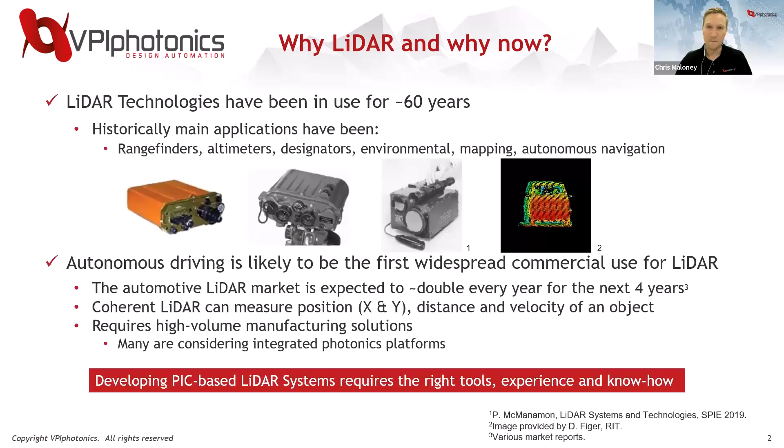So just a very high level overview. I know there's a wide range of people in the room today, some with a lot of experience, some with almost none. So I'll just take you through this block diagram, the concept of LiDAR, how does it work? And then we'll get into more details as we go forward. But it first starts with a waveform generator. So this is an electrical sinusoid that drives your transmitter or your laser. And that laser goes through some optics or some beam steering so that you can actually scan an entire scene.

And that laser will propagate through atmosphere or free space. There might be some weather conditions to consider there. And it will reflect off of a target. And it will reflect back through that atmosphere, back through free space, and get detected on the other side. Now the laser signal and the signal coming back to the detector will actually be mixed together. And what you'll get from that is a beat frequency. And essentially you're measuring the time of flight, so that you can get the distance from your position to that target.

There might also be some Doppler effect if that target is moving. And in that case, you can actually measure velocity as well. And then there's some digital signal processing and readout electronics as well, which we won't touch on today.

So it seems like a pretty basic concept, but there are tons of things to consider, such as the type of system. Is it direct detect? Is it coherent? How are you actually imaging a scene? Are you using flash or scanning LiDAR? What are the weather conditions like? What wavelength are you using? The type of laser, is it a fiber laser or is it an integrated laser? DFB, DBR laser, is it a VCSEL? There's a lot of options there.

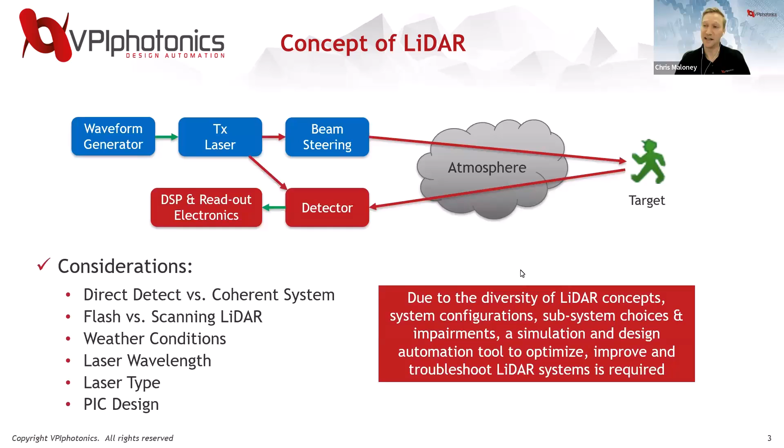So just to give a brief outline, I'm in the middle of some of the background information right now. The first section we'll be talking about is ranging. So we'll actually go through the design of an FMCW LiDAR system. So Nebras will take us through that, show the behavior of it. And then Eugene will join us and talk about the PIC-based transmitter design. And he'll focus really on the laser and the non-linearity of the laser and how do we mitigate that in the system.

And then we'll move on to beam steering, and we'll stay at the PIC level, the circuit level, and talk about an optical phased array for beam steering. And then we'll take it back to the system level and talk about simulating adverse weather conditions and how does that impact the imaging performance of an entire scene. And then we'll conclude.

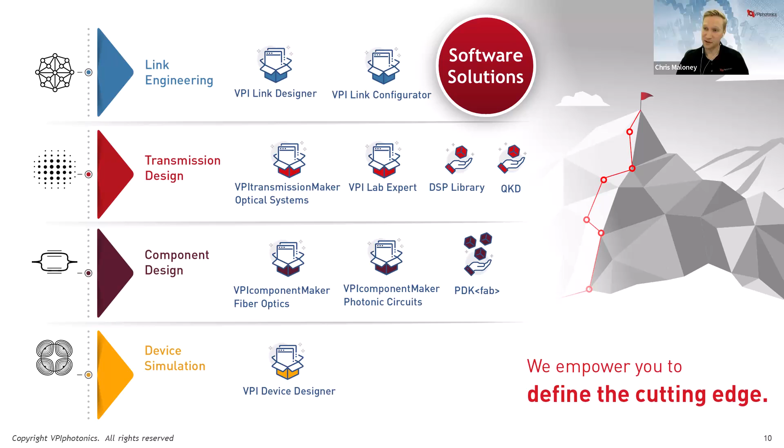So just to give an introduction to VPI Transmission Maker Optical Systems, there's a wide variety of applications this can be used for. It's mainly used in the datacom/telecom space, so for short reach or long haul DWDM systems. But we're getting more and more users using this for free space optics as well. So satellite communications has really been driving that lately, and now LiDAR. And so a lot of what we've developed for satellite communications, we can actually extend into LiDAR as well.

So there's many things you can do, explore different modulation schemes with the software, explore different technology choices. You can see it's schematic-based design. And there's a pretty flexible analysis environment as well that you'll be seeing. So you can see a lot of eye diagrams and constellation diagrams here. And we've actually implemented some custom analysis for LiDAR for this example today.

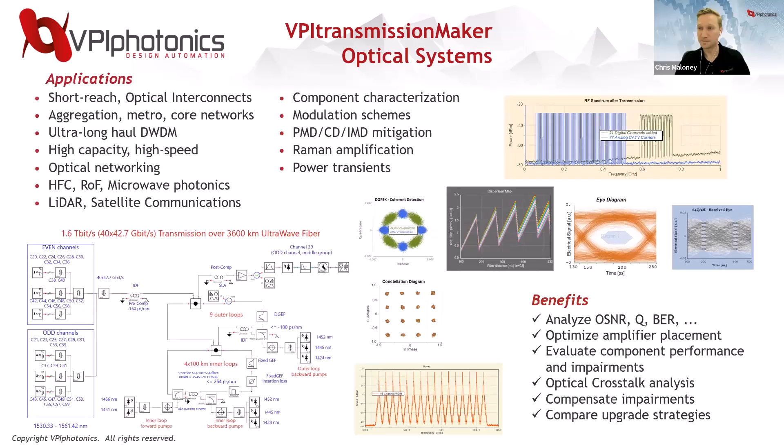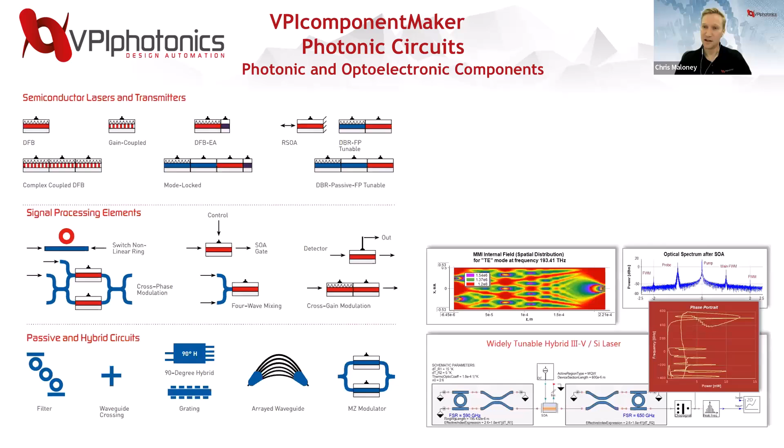We'll also be focusing on VPI Component Maker Photonic Circuits, which includes a library of models and building blocks that include active components, signal processing elements, passive components. One of the key points here is that we actually combine time and frequency domain simulations together. So you can have a quick simulation, but still maintaining the accuracy that you need.

And in particular, we'll be focusing a bit today on our active devices, so the laser, and they're based on the photonics transmission line laser model, or photonics TLM model, that Eugene will be describing today. Some of the key points of that is that it includes carrier dynamics, spatial hole burning, nonlinearities, so gain nonlinearities, two-photon absorption, and it's bidirectional as well. So Eugene will be focusing a bit on that later on today, so stay tuned for that.

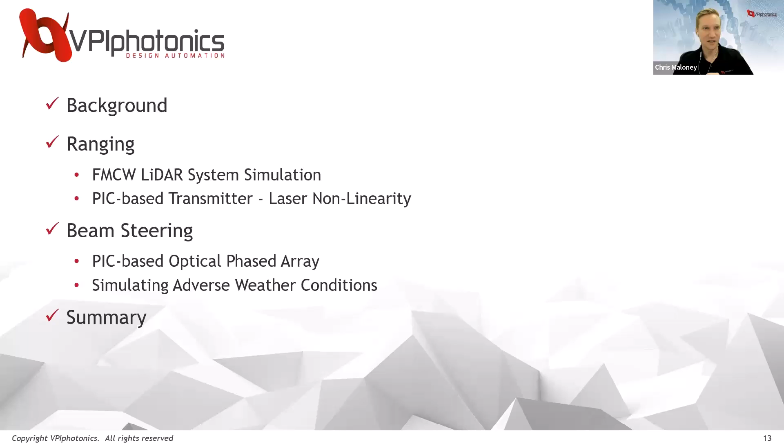And at this point, I'm going to turn things over. We can jump into the technical details. We'll actually get directly into the software, and I'm going to turn things over to Nebras. So Nebras, feel free to share your screen. Thank you, Chris. And the floor is yours now. Thank you, Chris, and hello, everyone.

My name is Nebras, and here I'm showing now the VPI Photonics Design Suite. This is the user interface. Let me move this a little bit. So you see here, we have several parts, and I'm going to focus on the system level. I'm going to start with part 1.

So now I have the schematic open in the workspace, and this is built using our tool for designing optical systems, that's VPI Transmission Maker. And this represents the FMCW LiDAR system. I'm going to explain how it works. So here you see at the transmitter side, we want to do frequency modulation. So we have a laser source with a specific laser average power, with a specific linewidth and a specific wavelength that's in the C band in this case,

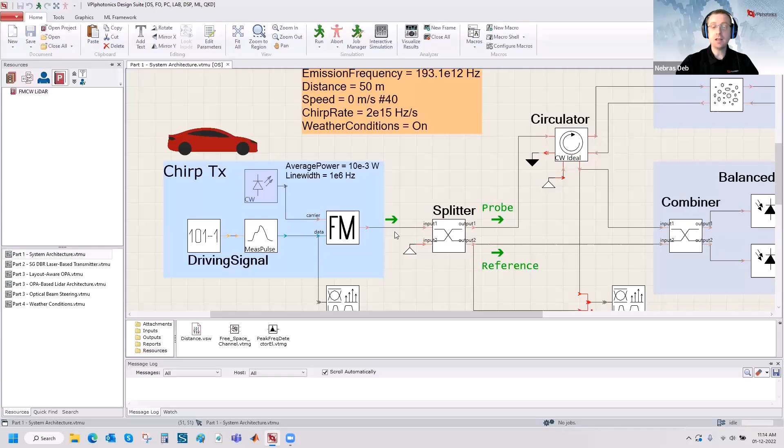that's around 1550 nanometers. We have these two modules which generate an electrical signal that has a triangular waveform, and we have this frequency modulator. This is an optical modulator. So this is driven by this triangular waveform, and it has also an input from the laser. So the optical signal of the laser is modulated using this triangular waveform. Therefore, at the output of the modulator, we have a signal that is frequency modulated. So we have the chirp that's varying in a triangular waveform.

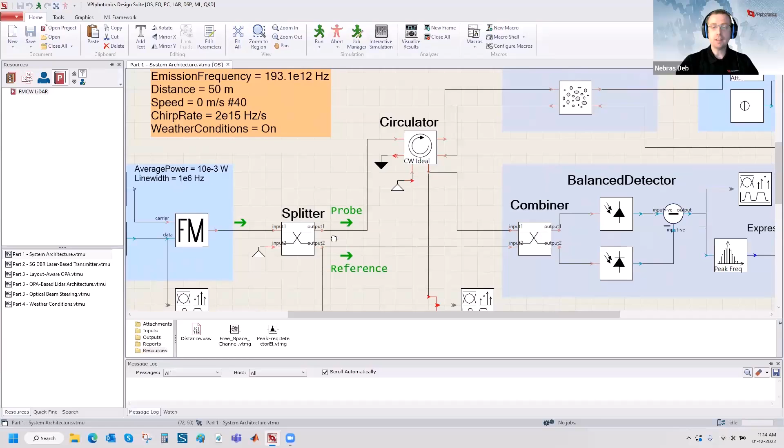Now, using this splitter, this signal is split. This represents a coupler. So it's split into two signals, the probe and the reference signal. And then the probe will go through a circulator and propagate through free space, hit the target, and come back. And then after that, it's going to be mixed with the reference signal here at this point with this coupler. And then balanced detection is used. And here the thermal noise is considered as well as shot noise.

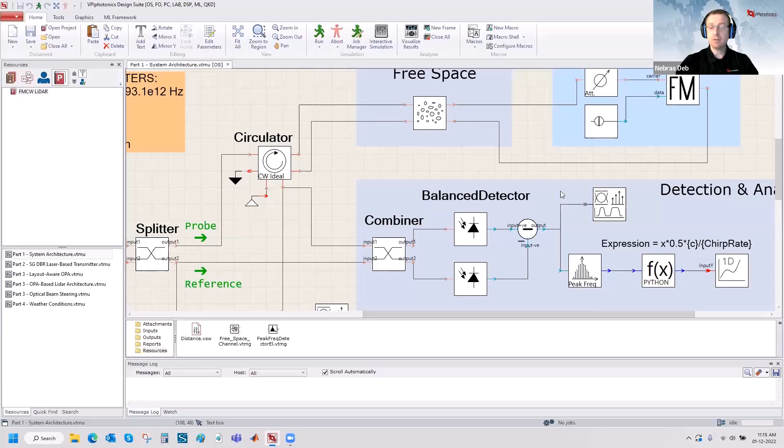At the output of the balanced photodetection, we have an electrical signal here, and then we take the spectrum of this signal and analyze it. So what we want to do is to find the peak frequency.

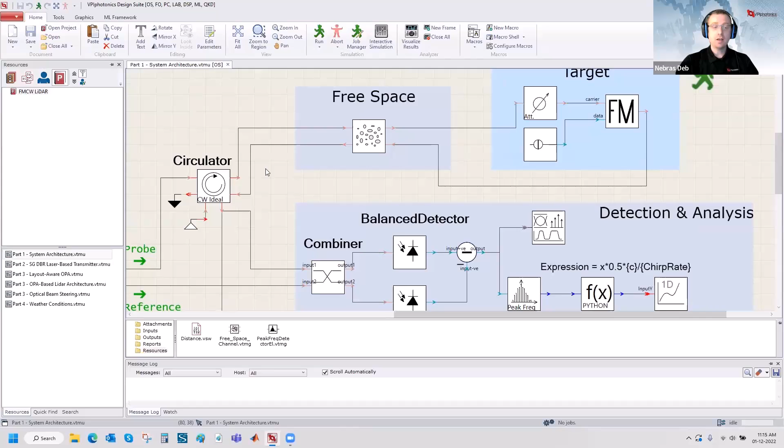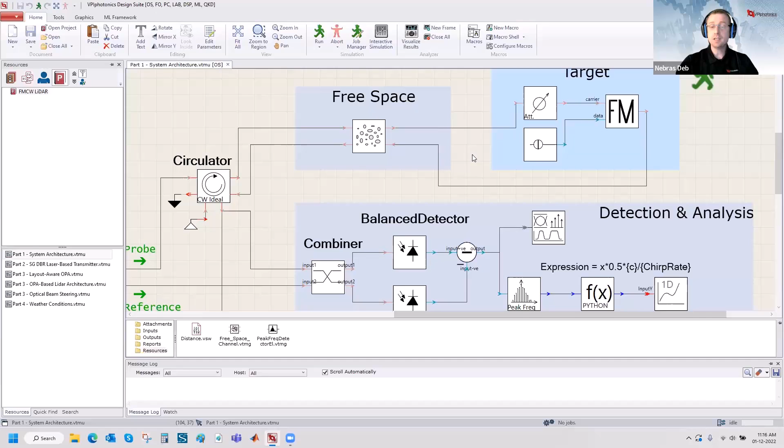What happens here is that the signal, when it propagates and hits the target and comes back, it will exhibit several things. It will have some attenuation. There is also a time delay, and there is maybe Doppler shift. So if the target is moving, then we will have some Doppler shift. So there will be a beat frequency in the spectrum, and this beat frequency is proportional to the distance of the target. So we want to then detect the peak of that frequency.

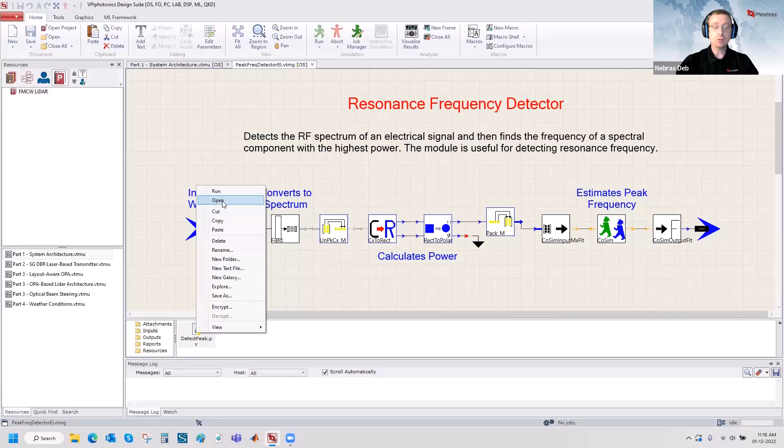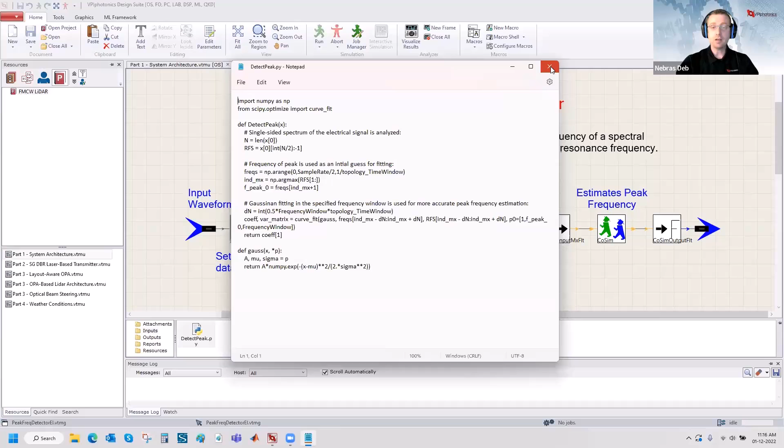This will tell us how far the target is, and then using some mathematical expression, we can extract the distance. This peak frequency detector uses co-simulation with Python. We can look inside, so we can look at the inputs. Here we have a Python script, so you can look at that. And it's very simple actually. What it does is take that spectrum and try to find the peak by doing some Gaussian fitting to the spectrum, and then it gives me the value of the frequency, and that's the beating frequency.

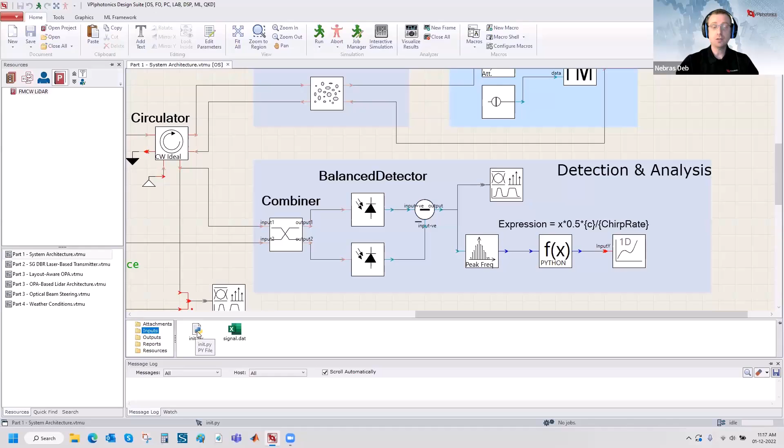Nebras, just quick question here. This file that you are presenting, is it possible for the people in the audience to download and to use it as a template? Yeah, they can. Well, if they have the software, like this demonstration is a part of the software, so they can basically access the code for this module here, and yeah, they can download it then.

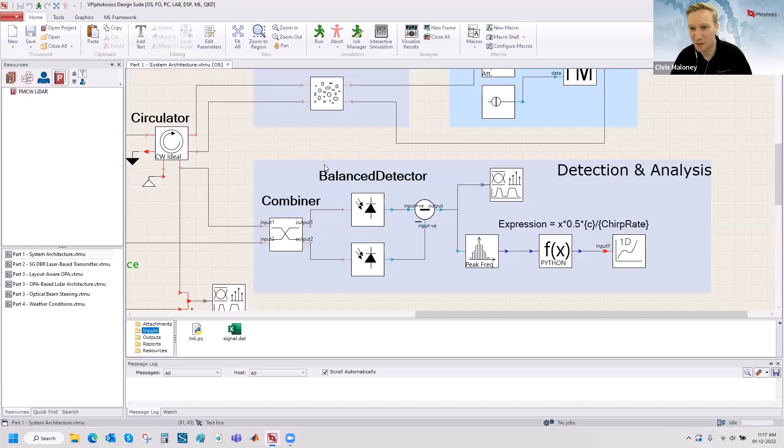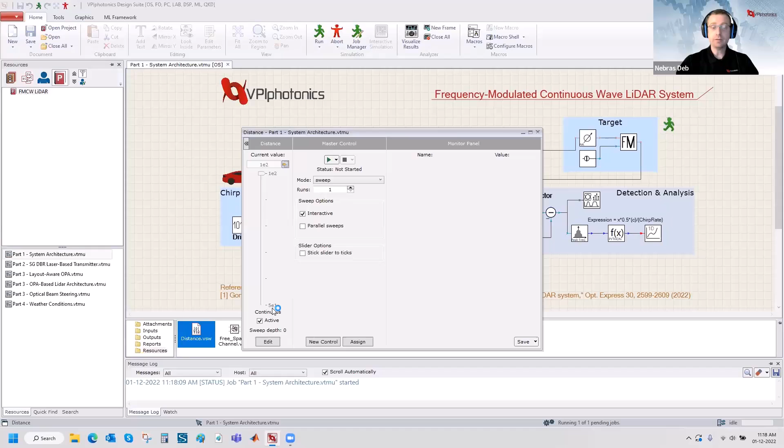So again, the target is located at a specific distance, and it can be fixed or we can sweep it. So I have here this sweep file, which is the distance. I'm going to open it. And what this does is use different values for the distance and apply that, and then we can visualize the results. So I'm going to run this. It's going to apply values between 50 meters and 100 meters to the target distance. Please note that we are doing single shot in this example. So for every specific distance, we are doing one shot and detecting the signal and looking at the extracted distance. So the results show in the analyzer directly, as you see.

So the first window here shows the driving signal as a triangular waveform. So this is an electrical signal. And this window here shows both the probe and reference signals together. What we are seeing is the frequency versus time. So this is the chirp evolution. And because we have different values, we can navigate between them. So this is the results for 50 meters, and then we can show it for 60, 70, 80, 90, and 100. And as you see, the larger distance will result in a bigger delay, and so we see a bigger horizontal shift. And this is the reason why when we mix the two signals at the receiver, we find a frequency peak here, and the location is proportional to the target distance.

Also, if there is a Doppler shift, we will see that this peak for the returning signal is higher than this peak because of the Doppler shift, and that will result in two peaks, as I will show promptly. So now, as I said, we are looking at the peak and then calculating the distance based on that, and we see these results here, and as you see, the distances are extracted with pretty good accuracy, within a few centimeters.

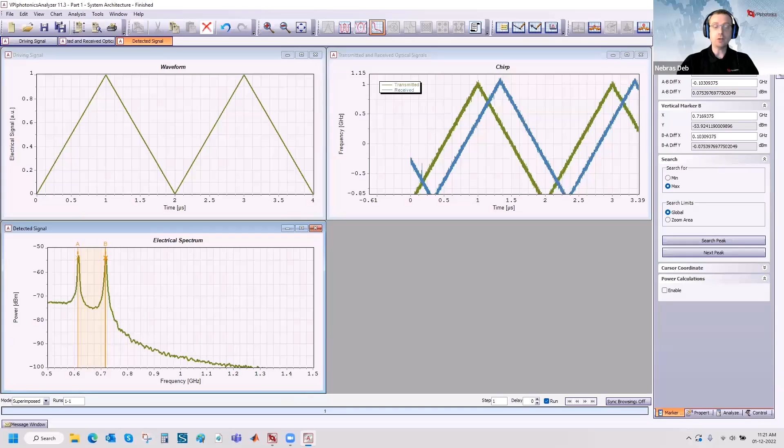This leads to a difference in the delay, or in the horizontal shift between the waveform going upward and downward. So there will be a little difference, and that leads to having two peaks here. Now, the frequency difference between these two peaks will tell me how fast the target is moving. So you can use markers and look at the frequency difference, and then you can calculate the velocity of the target. So in one shot, you can find the velocity and the distance of the moving object, and this is the benefit of FMCW LiDAR systems.

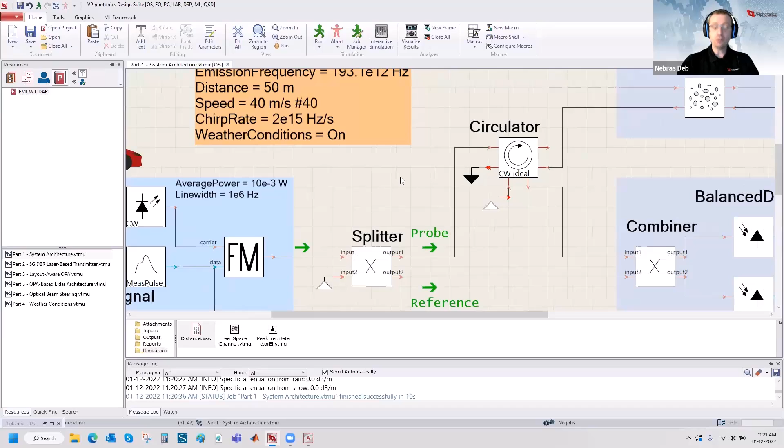So using a system like this, one can look at the different constraints, such as the line width of the laser. You have also the chirp rate. That's another constraint. Well, how far can the signal go given these parameters? You have a certain attenuation. We'll be looking more into these details, especially the attenuation that the signal exhibits, in part 4.

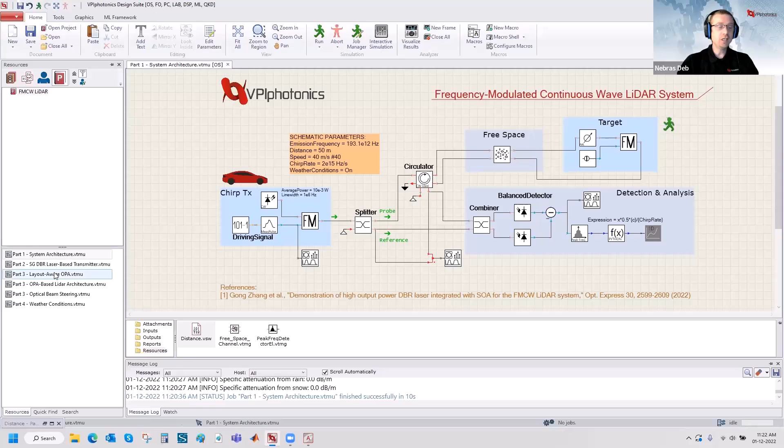So at this point, I would like to pass the talk to Eugene, who will be talking about the other parts. So stay tuned.

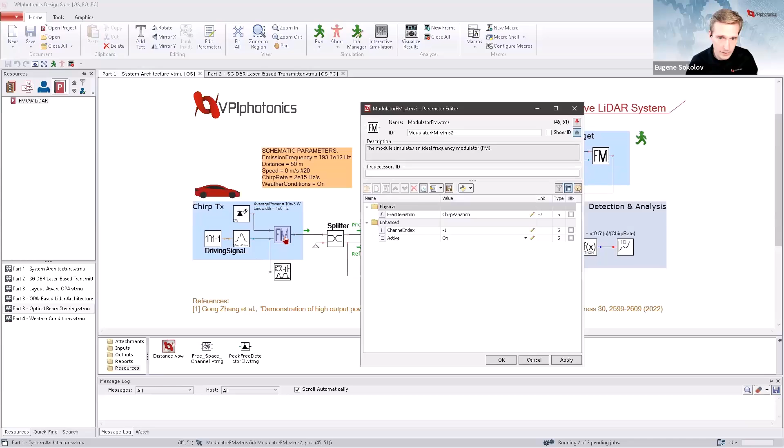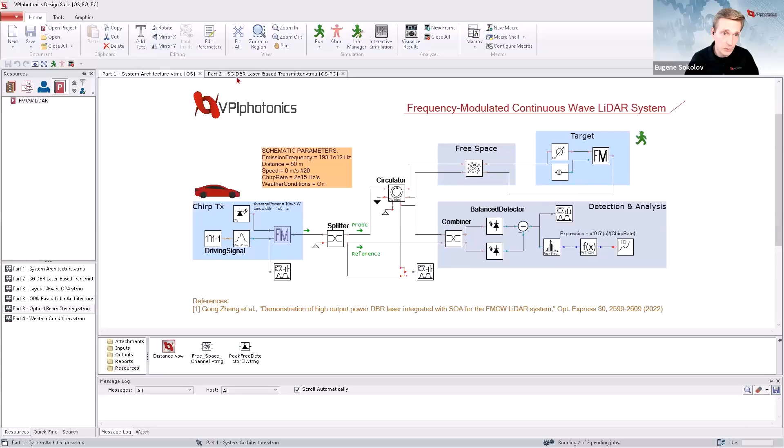It had this ideal frequency modulation as well. So everything is ideal, and we got these very nice pictures at the end. To dive deeper into the physics of operation of the devices, we need more accurate models. Here's another schematic in which we have the transmitter subsystem based on a DBR laser, which is described in this paper on the bottom. So you can check this design, and let's study how more accurate, more physical modeling of the laser impacts our system.

Let me elaborate a little bit on the design of this transmitter. It is based on a DBR laser, so it has a front and back mirror to form the cavity. It has phase tuning for mode selection and tuning our frequency. Obviously, it has a gain section for the stimulated emission, and it also has SOAs, semiconductor optical amplifiers, and spot size converters or tapers to increase the output power from this laser.

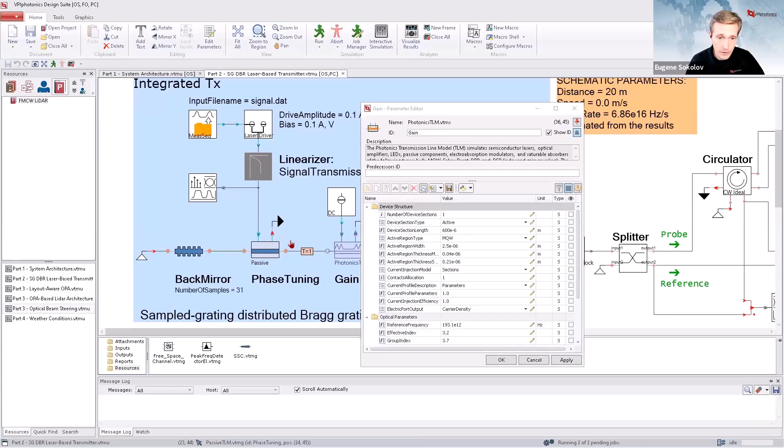The models for the gain, the phase, and the SOA are based on the VPIphotonics TLM model. That's one of the most advanced models we have in our integrated photonics tool, and it allows for modeling spectral effects, spectral dynamics of the laser, studying carrier and photon dynamics. It also includes non-linear effects, so two-photon absorption and Kerr non-linearity effects are included. You can specify your gain, your noise of the system, and so on. So it's really very advanced.

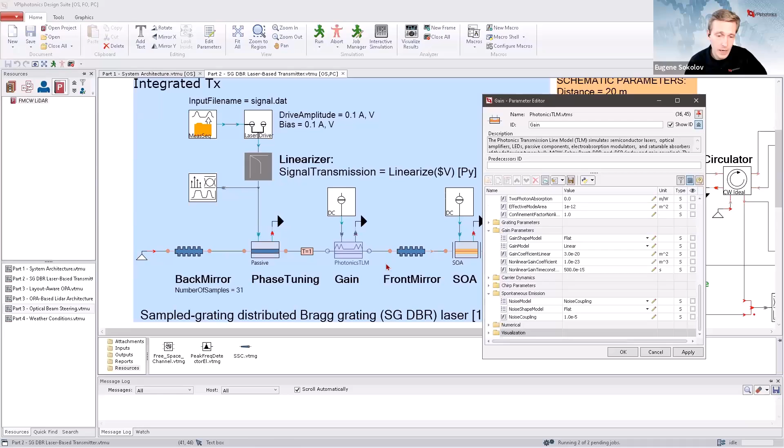It is bidirectional, since in order to form the emission we need reflections from both mirrors. It's spatially distributed, so spatial hole-burning effects are included, and we can see and visualize how the carrier and photon densities are distributed along the cavity. Overall, it's a pretty advanced model. Because of that, it takes a little longer, so let me run the simulation right away.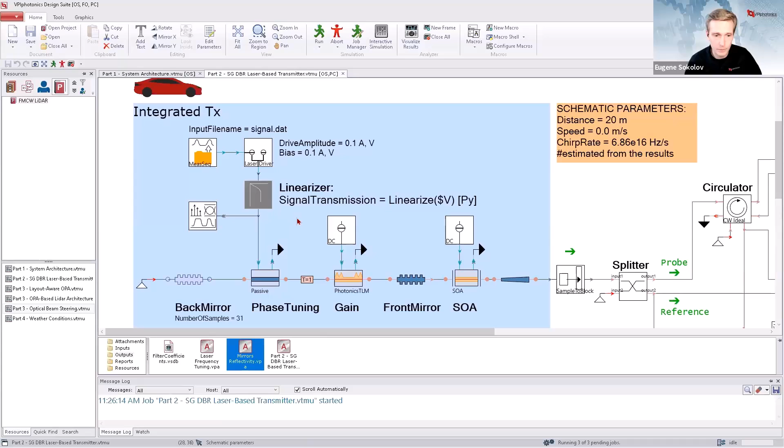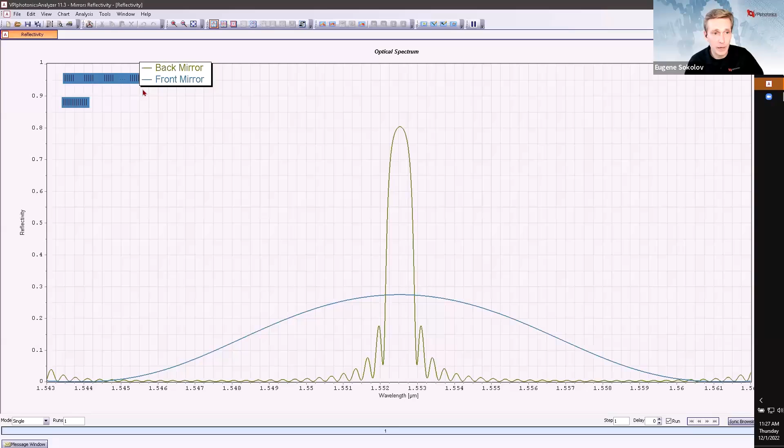And just continue talking. First, we need to work on some particular parts. In order to obtain the emission for a particular frequency, we need to align the reflectivity of this mirror. I pre-ran this simulation. Let me visualize this. Here's my simulation results. It's not that easy to do: you need to adjust the reflectivities, you need to adjust the phase shifts. The whole work is done for both mirrors. One of them is just a regular Bragg grating mirror, and another is a sampled Bragg grating. Both are possible to simulate.

Once we employ this in the system, the system remains pretty much the same as Nebras was talking about. We split the signal, we obtain the probe signal, which travels through the circulator and free space, hits the target, is reflected back, experiences some attenuation and some Doppler shift, and then is combined in the splitter with a reference signal and detected by a balanced photodetector. And we can analyze the electrical spectrum. So let's take a look at the results. They're still coming, but we can already see a few important peculiarities here.

So in the first one, we apply again this triangular shape signal to drive our laser. And we can see that, yes, the frequency is tuned. However, if we take a look at the response, we see that it's not linear anymore, right? And the problem with that is that once we take a look at the electrical spectrum, we cannot detect the peak very well anymore, and therefore it leads to a huge error in the estimated distance.

So yeah, for an FMCW LiDAR system, it is crucial that our sweeping laser frequency is linear, that it has a linear response. So how could we achieve that? We could achieve this by applying some pre-distortions. So let me activate this guy here and run the simulation again. And while it's running, I'll explain what it does.

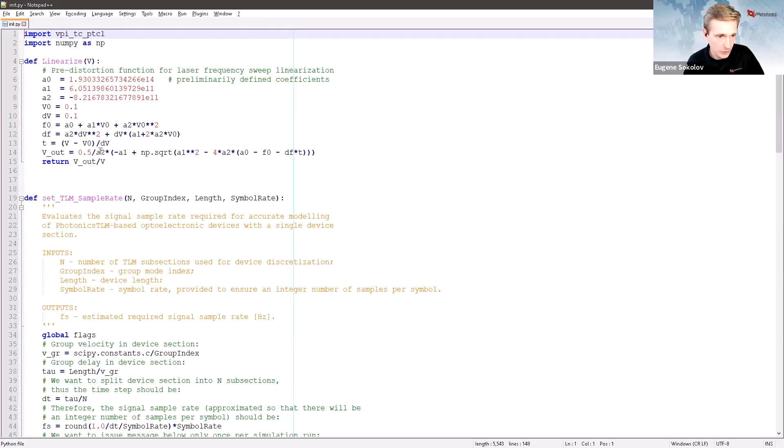So the idea is that based on the response we just received, we could apply some pre-distortion. So we have some function here defined. I can open and show this function to you. It's very simple, just a polynomial function, which distorts our electrical signal. And actually, that's a pretty good technique. Once you get this example, you can play around. You can define your own functions here, maybe even call third-party software using this technique. But in our case, it's a very simple function. And let's see how this pre-distortion actually impacts our results.

One thing I forgot to mention, which you might wonder about, is those transients which we can see. Those originate from the physical behavior of the laser. In the real system, you would like to avoid some of these transients or mode hopping. But in reality, you might see them. The reason I left them in this example is just to show that these kinds of effects are included in the laser model. So it can account for initial transients. It can account for mode hopping effects. And obviously, all of them have a drastic impact on your FMCW LiDAR system.

In the first place, what we can see with this pre-distortion switched on is that our electrical signal, our driving signal, is not linear anymore. Let me take the drawing tool again. So we can see that it's not linear. On the other hand, if we take a look at our frequency response now, it is linear. And we can see this in the detected electrical spectrum right away. So we can distinguish the peak just perfectly fine once again, and we can estimate the distance with high accuracy.

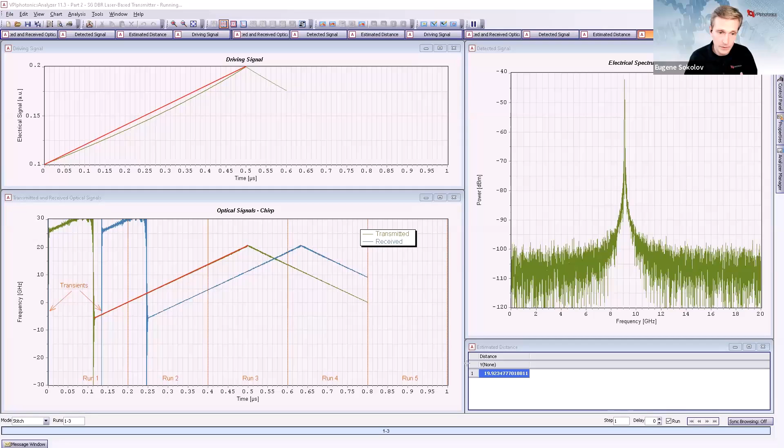So we can see that linearity of our laser system, of our transmitter, is essential for FMCW systems, and this needs to be accounted for properly in the simulation if we want to study these effects and explore how they could be mitigated. Okay, let me continue going down the rabbit hole here and switch gears a little bit.

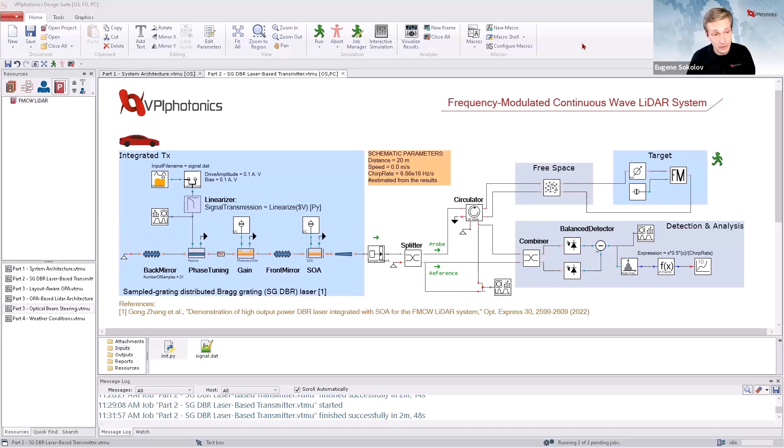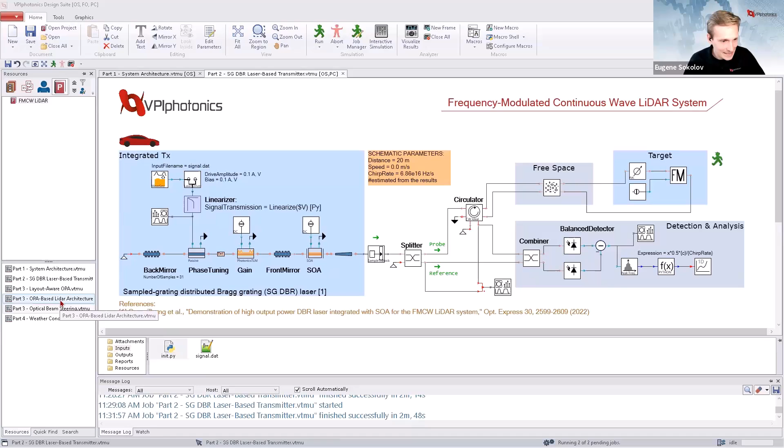So in all our previous discussions, we considered the distance to just one single point. And obviously, this doesn't give us a full picture of our surroundings. One would like to know if there is a person in front of us, or a car, or a building. For this, we need to scan our beam in both horizontal and vertical directions. There are various solutions for that. I saw someone writing in the chat about MEMS, but I think the ones based on photonic integrated circuits and hybrid integration in particular really shine for beam steering applications. I'm surely biased because I deal with integrated photonics, but let's look at one of those solutions.

Let me open another schematic. Recently, solid-state optical phased array beam steering techniques have been extensively studied, and we present one of the examples described in this paper here. It was experimentally studied and proved to be applicable for FMCW LiDAR systems. So this is a very relevant example, I think. Let me spend some time explaining how it works. There are two main physical effects going on here. Let me start from the end, from the simplest but most crucial one.

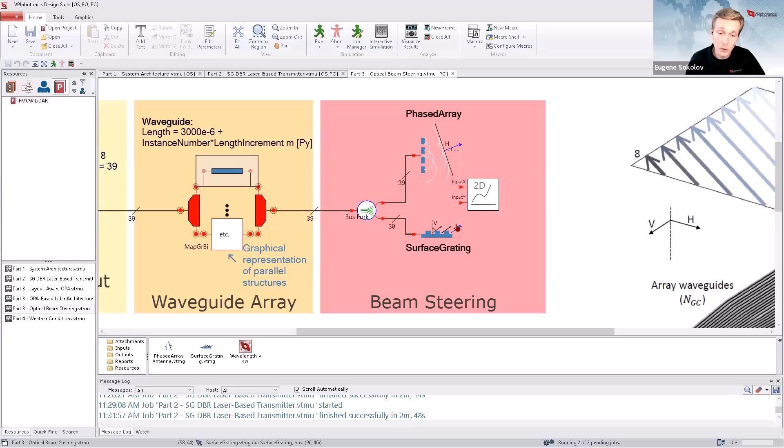One of them is based on this grating coupler here. It's our main radiating element, and it radiates the light at different angles depending on the light wavelength. So tuning the laser emission frequency or wavelength allows for steering in one direction. Let's call this the vertical V direction, V angle for vertical. We can see this picture here. So we can steer it in this direction just by applying these two surface gratings. The second direction, let's call it H for horizontal, comes from the optical phased arrays.

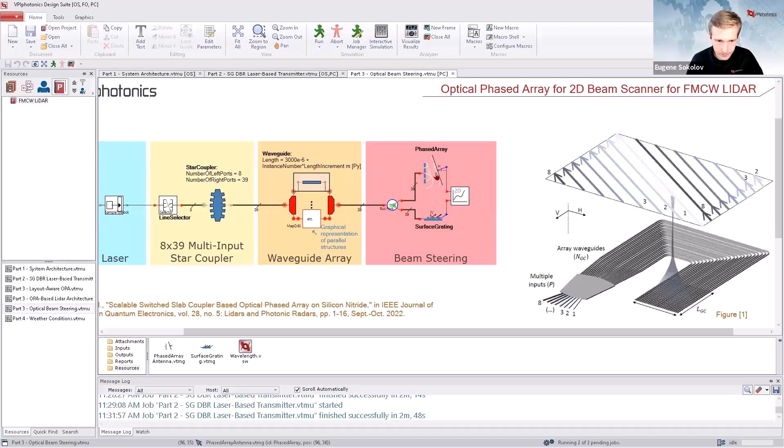First, the signal is split. So we have our laser signal. It is split using this star coupler into a couple dozen arms, and then they travel through the array of waveguides, and we can see this little guy, which is a graphical representation of 39 parallel waveguides. They're not identical though, so they have a varied length. So each next waveguide has a little larger length defined by this length element.

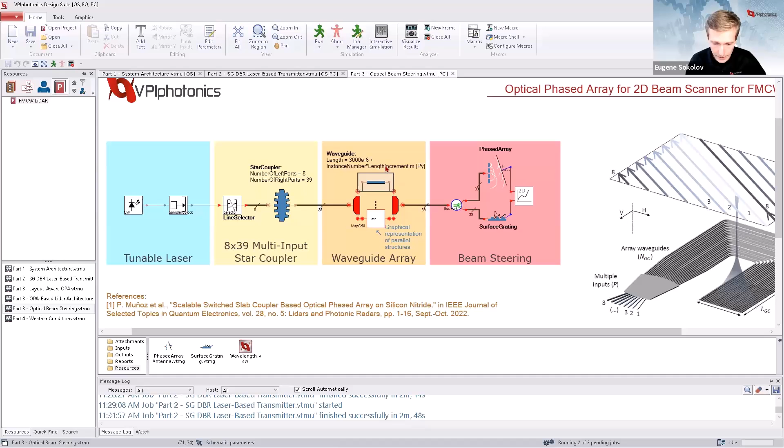And at the edge, the light is emitted from these multiple surface gratings or grating couplers. And the waves from these elements start to interfere. But because of the different length we had in the array of waveguides, they have different phases here. And because of that, they actually amplify each other at a particular angle. And this angle is defined by the phase shift which was accumulated in this array.

So how do we change this difference, or how can we tailor this? Well, one obvious thing is to change the length increment. It's not practical, obviously, right? You cannot change the length very easily on your circuit. Another pretty common way is to have some phase shifters in these arms and apply some currents and vary the phase. It's a little bit hard to scale, and even for these around 40 arms it becomes pretty cumbersome already. In this particular case, the dispersion of the waveguides itself is used.

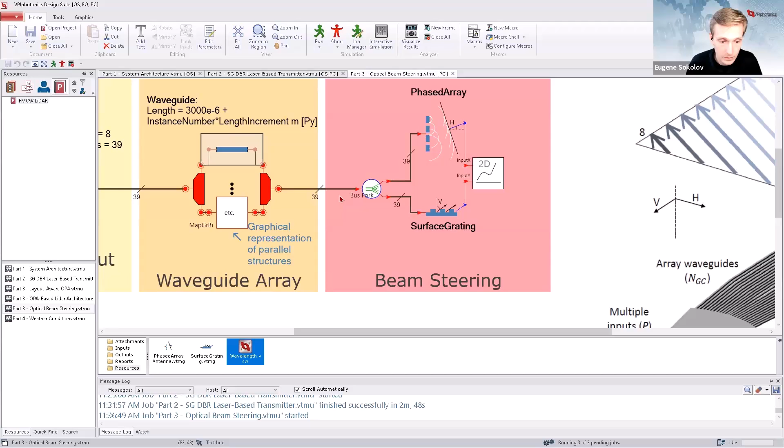And let me run this simulation as well and vary the wavelength. So hopefully it works with all the VPNs and connections. Okay. So what we have here, we sweep the wavelengths from 1525 nanometers to 1575. And let's see what happens in both directions. So we detect them. Let me open the simulation results.

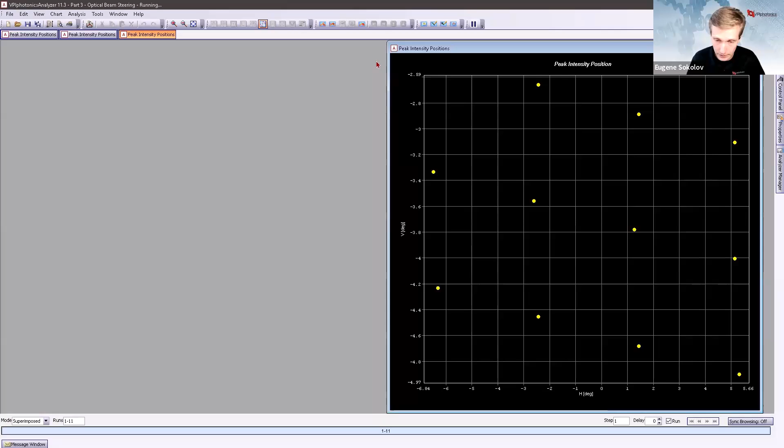So in the first place, we can see that our peak intensity position, with just varying the wavelengths, varies in both horizontal and vertical direction. So again, from vertical, we could expect this, right? Because we have this grating coupler to vary it. But what happens in the horizontal direction is exactly what I was mentioning. We change the wavelengths and we change the phase relations between our waveguides. And this allows for sweeping.

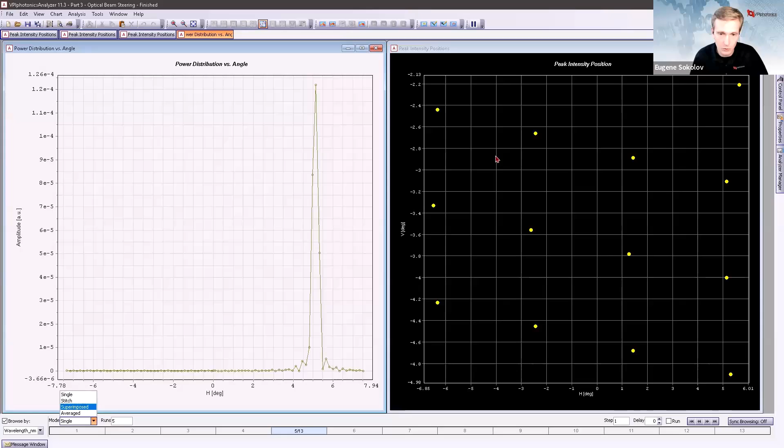There is one more thing here: once we reach the edge of our field of view, if we have it properly designed, we start sweeping from the other direction again. This should be designed, but it allows for steering in the horizontal direction in a pretty wide range. However, because our vertical and horizontal angles are related to each other, there are some gaps in our field of view which couldn't be covered. So how could this be resolved?

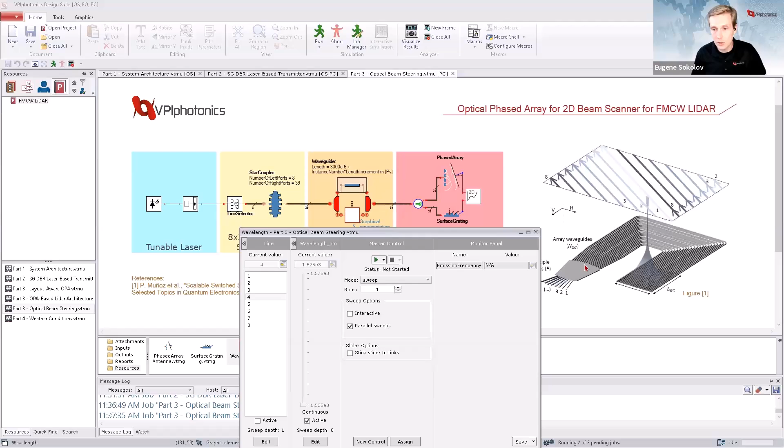The method proposed in the paper is to use multiple inputs at the star coupler. If we apply the light into different ports, we could effectively shift our picture to different angles. Let me show you this by running the simulation once again. In the first place, we don't expect our vertical position to be varied because we fixed the wavelength, so the vertical position doesn't change. But let's see what happens in the power distribution versus horizontal angle. So it's almost there.

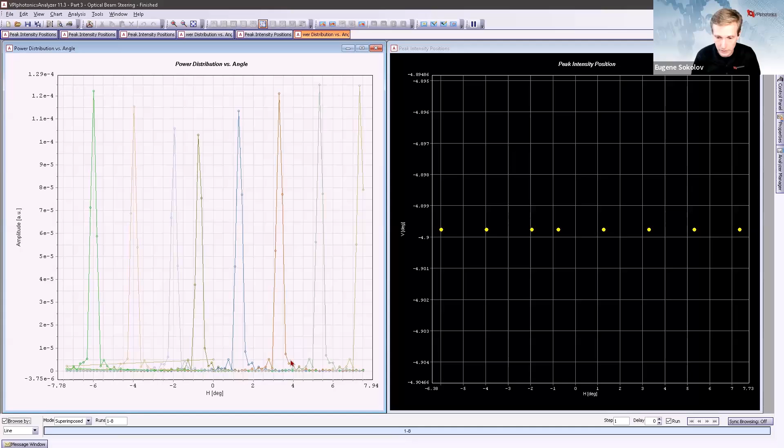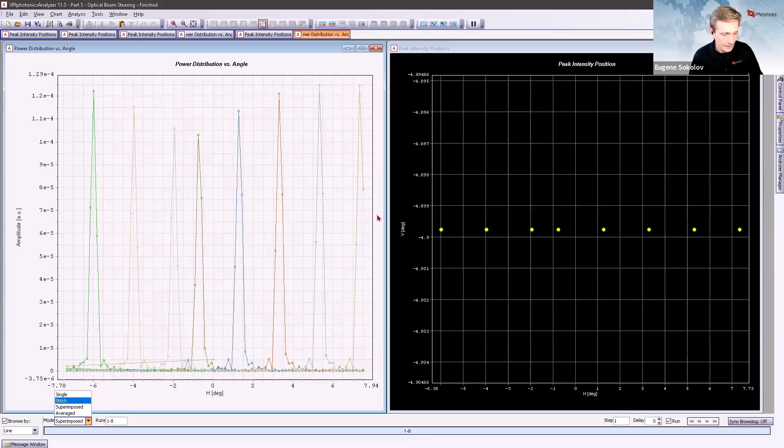Okay, so that's what we see here. Our vertical angle, as I mentioned, doesn't depend, but our horizontal angle does depend on the port we applied our signal into. And again, if we design this properly, we can cover pretty much all the gaps we had in the previous case when we had just one single input port. I pre-ran this simulation, so I can just visualize the results right away. So here's the simulation results.

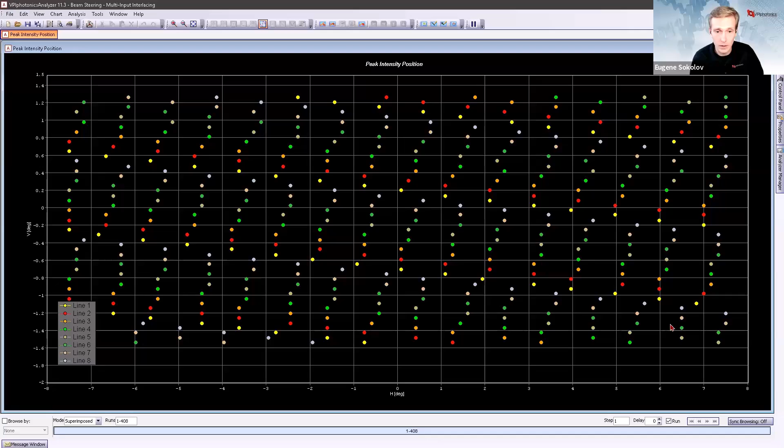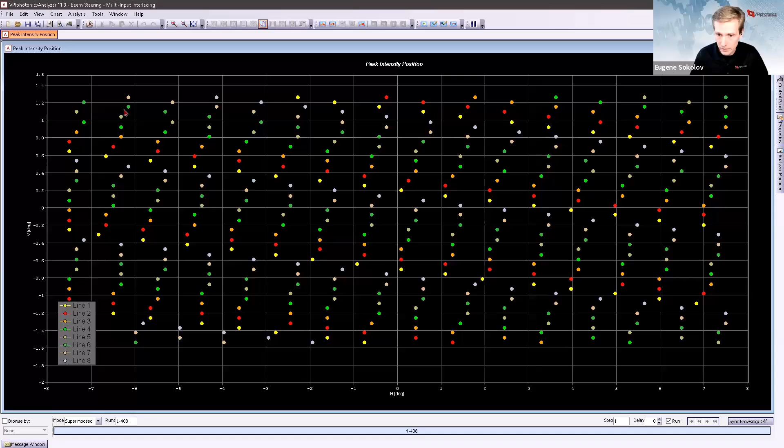So doing both the frequency sweep and applying to different input ports in the star coupler, we can cover a pretty wide range of our field of view. In the horizontal direction, it's actually pretty large, about 15 degrees. It's not that large in the vertical direction, just about 2-3 degrees, which has to do with the design of the grating coupler. So how to overcome this?

I can close this. Different grating couplers could be used. So you can have multiple devices like that, multiple OPAs with slightly different grating periods. And this allows us to cover a way broader range in the vertical direction. So here's another simulation result. If we have multiple OPAs with slightly different grating periods for our grating couplers, we could cover a pretty broad range, about 13 degrees in the vertical direction.

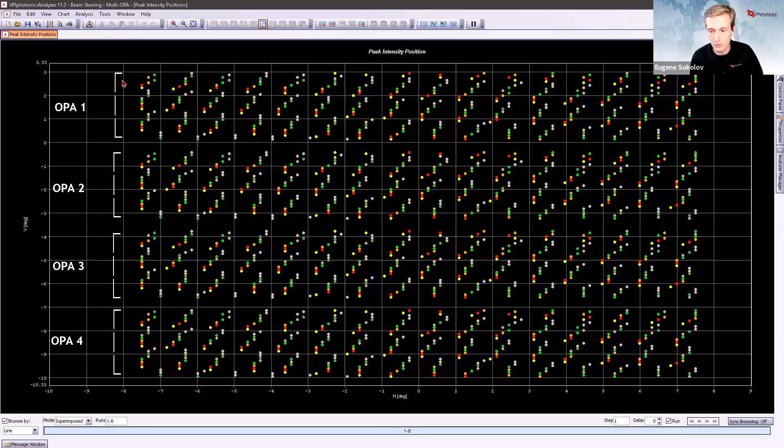So that's how the beam steering could be done. But obviously, that's not something which you would think of when you say about designing integrated photonics, because actual photonic circuits design implies a layout of your chip and fabrication. So how could you do this, and how could the software be of any help here?

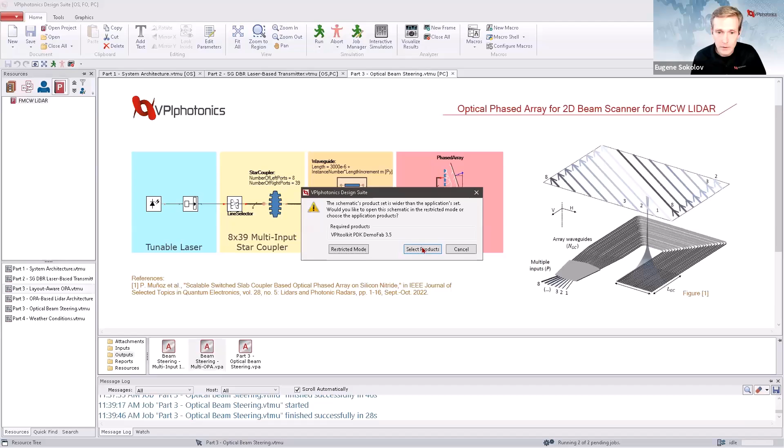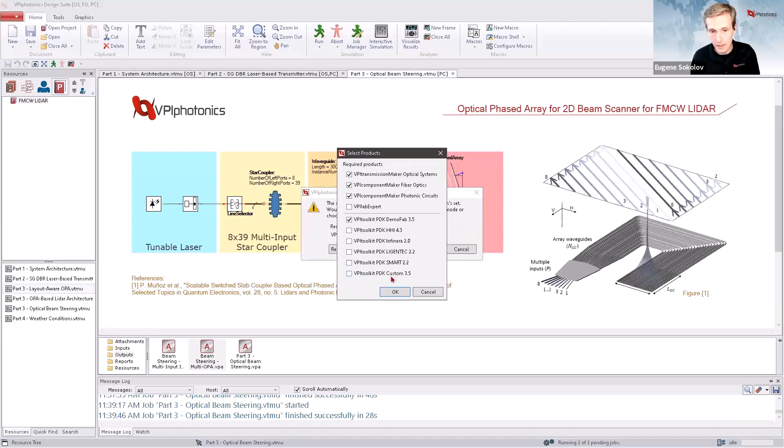So in the first place, okay, let me open another example. So in the first place, once you start thinking of fabricating your design, you need to think of a technology, and you think of a photonic foundry. So for this example, I'm going to use just DemoFab, but you might use some other commercially available foundries, or actually you might come up with your own custom PDK. So what's a PDK? A PDK is a library of predefined components, on the simulation side at least.

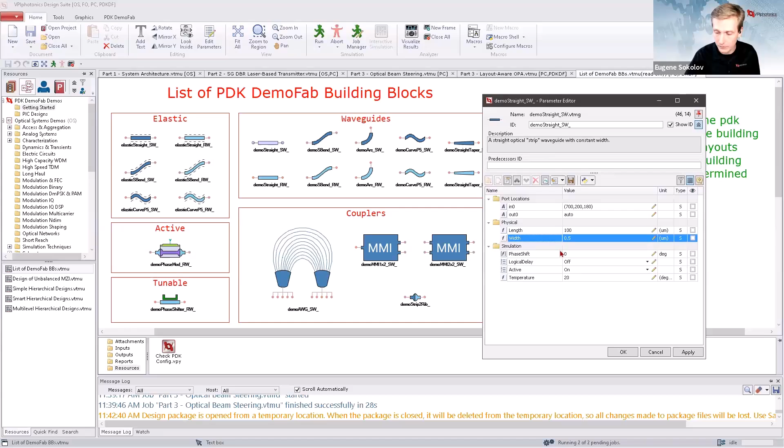Maybe I can show you the list of PDK. So it has some restricted set of modules. They have some models which reproduce the behavior of actual devices fabricated at the foundry. It has very few parameters to control because the models are already incorporated inside, but it might have a few parameters to vary.

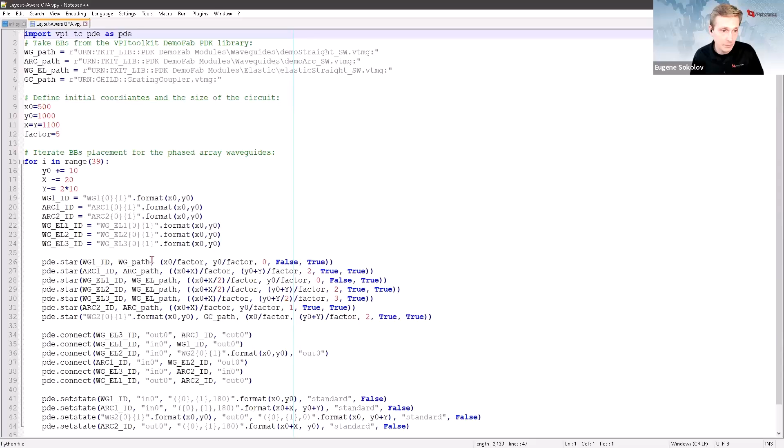Okay, and as you understand, that's a pretty large scale circuit, and creating it from scratch could be a tedious task. So what we can do, we can use some scripting capabilities. So what is done here, we just take a couple basic structures like waveguides, arcs, and grating couplers. And actually, you can also include your custom devices like this grating coupler in this case, and just place them and repeat as many times as you wish. So let me show how this works.

And the good thing, you can customize it, you can redraw it, you can vary the parameters, and you can, again, use your custom components here, and this is all automatically created.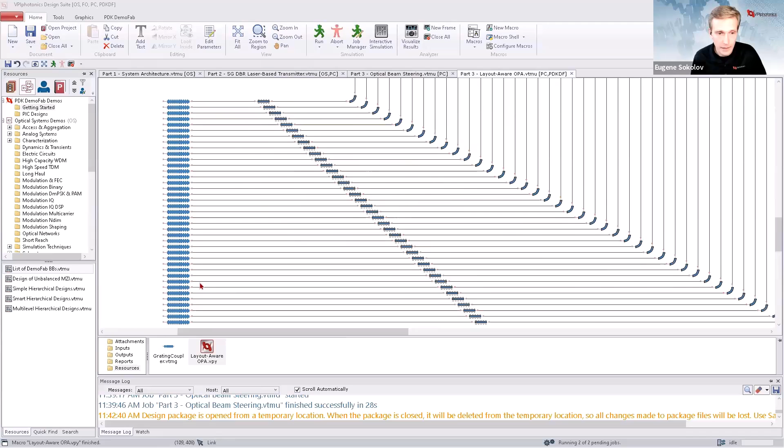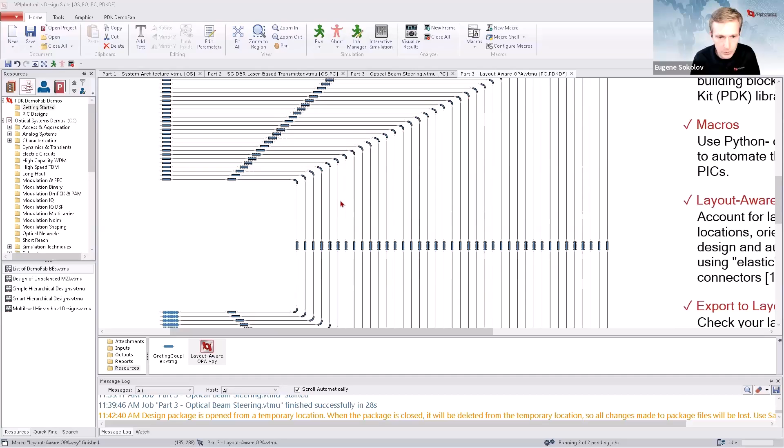However, the fundamental peculiarity from the simulation perspective for photonic integrated circuits is that waveguides have this dual nature. So they not only connect our elements, but they also function as elements. As you remember, the phase depends on the length of the waveguides. So in the simulation, it's very important to account for the proper length of our waveguides. That's why we came up with the so-called layout-aware schematic-driven approach.

So in the circuit simulation, you actually invoke some layout information to get the proper length and shapes of the waveguides. So you can see, for example, here that we have so-called elastic connectors, and we have some port locations in the element. So already on the circuit schematic capture level, you could account for the actual physical locations of the devices on your chip. And you can use automatic routing using these elastic connectors. So they just connect these two elements automatically.

So we can take a look at the top layout view for this circuit. So there is a top layout view. You can see that's already the actual sizes of the devices. So there are some grating couplers here. So you can check here if the circuit is consistent, and if there are any broken connections, it will be indicated on the circuit.

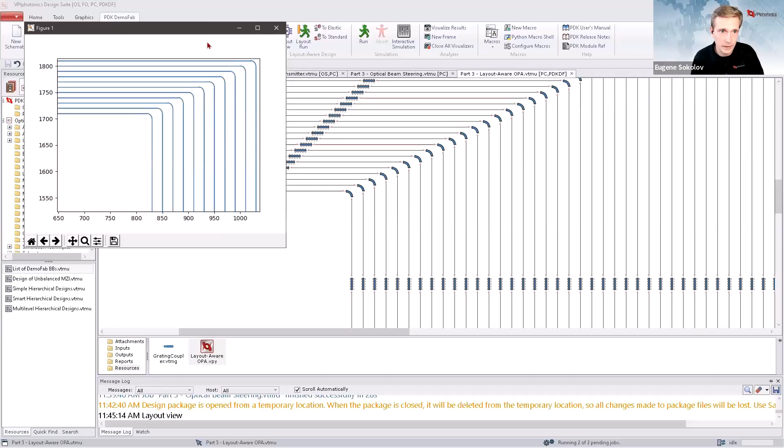Finally, in order to do the layout, you might want to export the circuit into your favorite layout tool, or even generate a GDS mask. Let me do this real quick. So it invokes one of the layout tools, Nazca Design in this particular case, in the background. It gets information about the actual sizes of the waveguides and generates a GDS mask, which could be visualized in KLayout, for example.

So obviously there are many things to study, and I'm looking forward to your questions. But now I would like to give the floor to Nebras again, to show how this beam scanning could be applied to real systems, to real images. Thank you, Eugene.

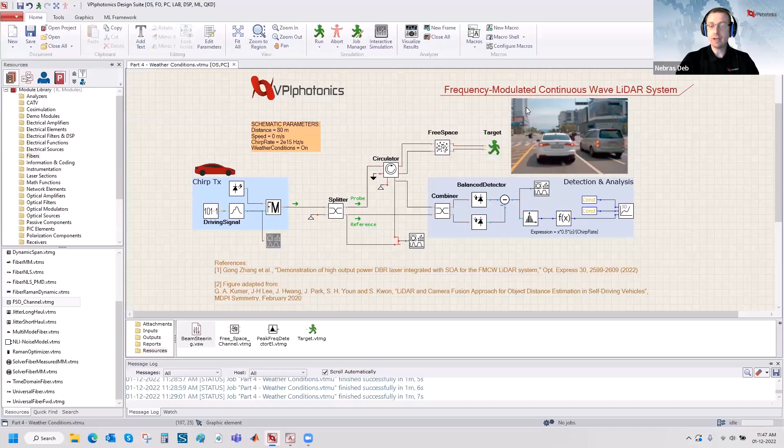Very nice. Yeah, so I'm going to talk about the last part of the schematics that we show in the software. It focuses on weather conditions, and it's similar to the first part that I showed. We are back at the system level. We have the system, but the difference now is that instead of doing one shot to measure the distance of that object, where there is one distance and one velocity, now we want to imagine the case where you have a scene in front of the LiDAR module, and you want to scan it all with beam steering, for example.

You want then to measure all the distances for all the pixels, and also consider the weather conditions. So weather conditions are one constraint for LiDAR systems in general. You can imagine that if you have a lot of fog here, then maybe the LiDAR module will not be able to detect or see these far buildings, for example. Maybe it will be able to see only this sedan and this van.

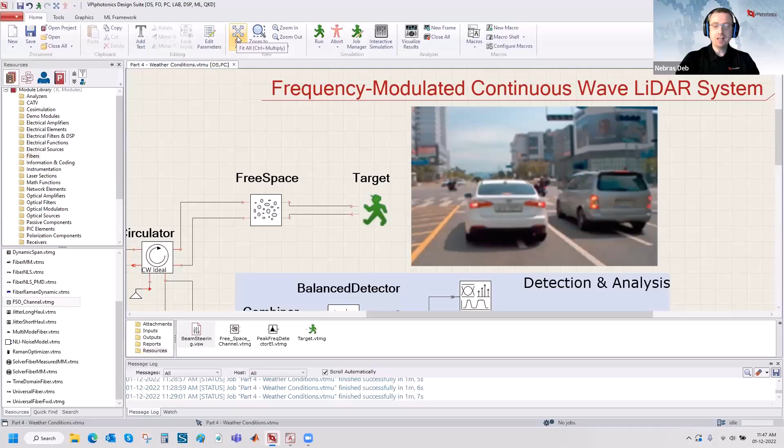And this is what we are going to be looking at. Fortunately, I have some results already generated for the different cases, and we have this module of free space. So let me show you what this does. Mainly the signal is going through free space through this module, and this module is basically for free space communications, and I can show it here as well.

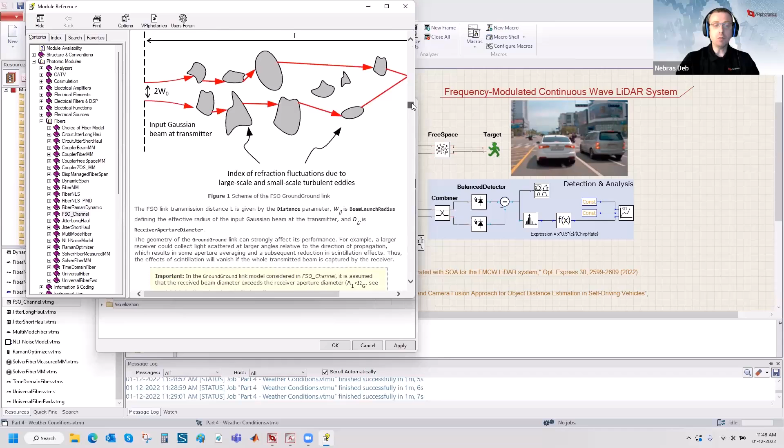You can specify the link type, whether it's uplink or downlink for satellite communications, or ground to ground. It considers scintillation effects, the atmospheric scintillations. You specify the beam length, beam launch radius, or the receiver aperture, and there is pretty much advanced modeling for the free space channel, as you see, considering the different effects. But it's also used here in this example for LiDAR.

In our example here, when you have more fog, you would expect to have more attenuation. So this module will consider whether you have some rain or some fog, and based on published literature, the attenuation is calculated. What we are doing here is beam steering. I have this sweep, and I'm going to vary the X and Y, scanning the pixels with certain steps, and then generating a figure.

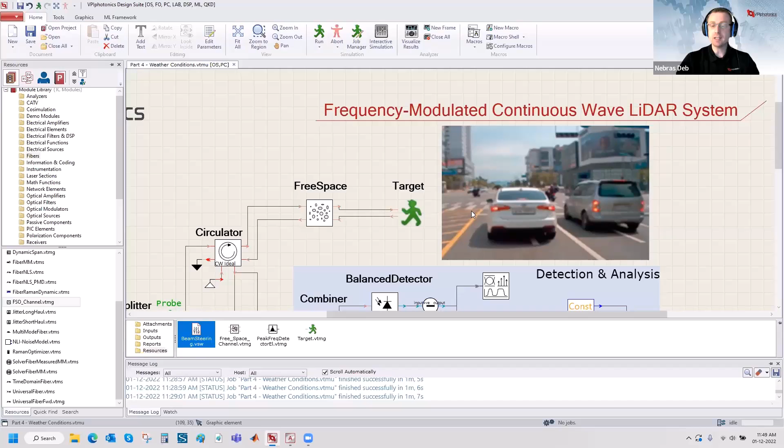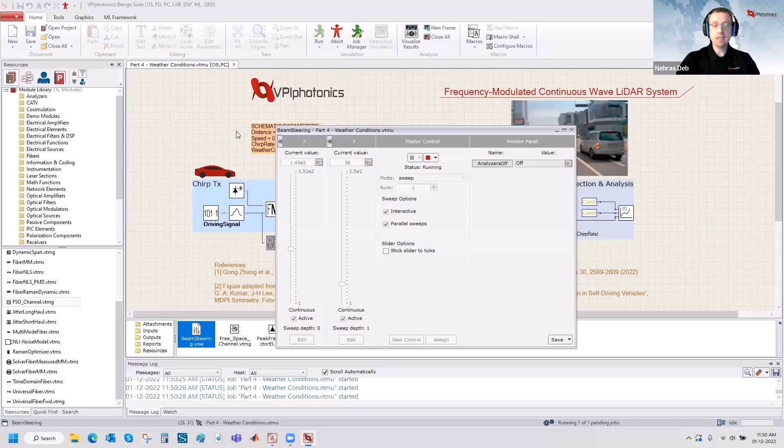And I'm going to do one run for the case of even more fog, the case of dense fog. Fortunately, we can use parallel simulation here, so it's going to take only one minute to finish. Now it's calculating the results for the last case. The fog is expressed by the variable visibility, whether it's 200 meters, 40 meters, or 20 meters.

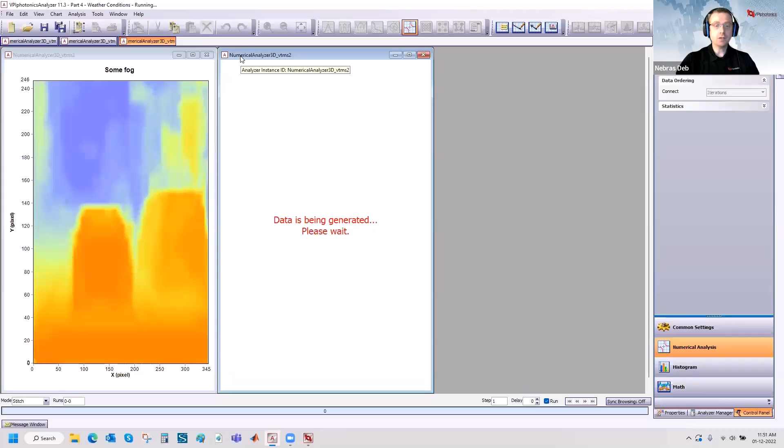By the way, there is a lot of research that focuses on this aspect, the weather conditions. Most of it is based on experimental work, where you have a big chamber, generate some smoke or fog inside the chamber, and look at the performance of the LiDAR system. But it can also be done in simulation, as you see here. As you see, it's running, and we'll start to see the results soon for this third case.

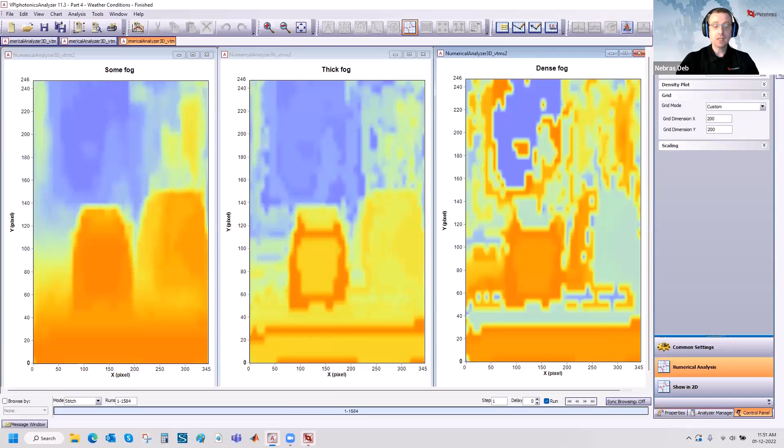Because we are doing parallel simulations, it's going to stack the results from different simulations together, and this is the final result that you see here. You can barely tell what's going on, unlike the first two cases. So we have some fog, thick fog, and dense fog. One can explore this constraint, the weather conditions, by adding more fog, maybe looking at the effect of using a higher laser power, or using some digital signal processing at the receiver side, and so on. So this is what I wanted to show you for this part.

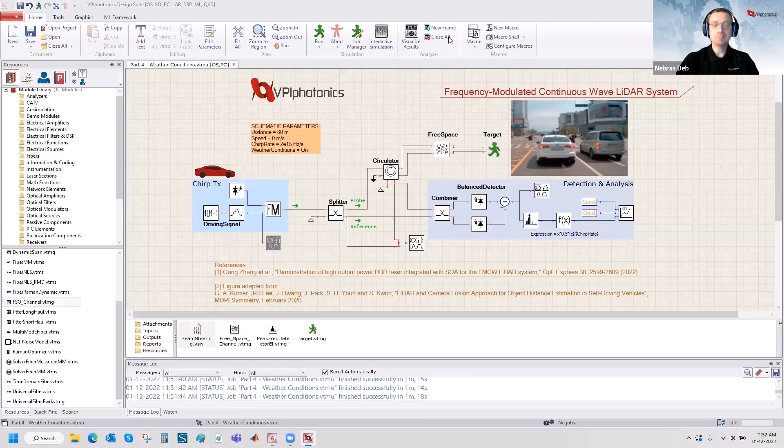And at this point, I'd like to pass the talk to Chris. Chris? Great, thank you, Nebras. As you can tell, there are a lot of different types of analyses that you can perform. I'm just going to summarize things real quickly here, and then we'll get into the Q&A.

Today we worked through our photonic design workflow, specifically component design and transmission design, all together in VPI Photonics Design Suite. And some of the unique things with photonic circuits, as Eugene already showed you, you can work with a number of different foundries and use their building blocks directly in the software.

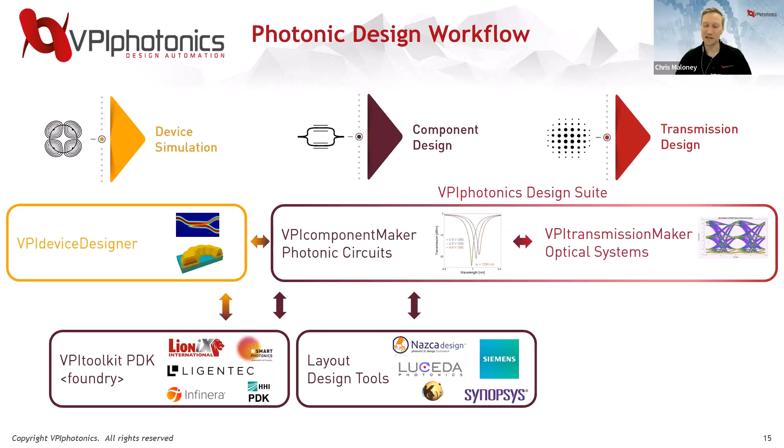And we also partner with a number of the different layout tool vendors as well. Now, one thing we didn't touch on, but you can do, is if you need to go into deeper levels of physics, we have VPI Device Designer, so you can design waveguides and fibers based on 3D beam propagation method. There's a number of different mode solvers in there as well. And on the other side, if you actually want to get into more electrical-optical co-design, we also have this integration with Keysight ADS as well.

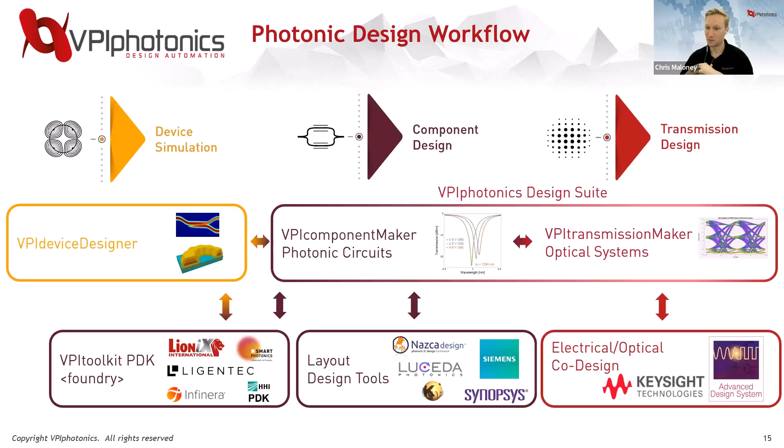So really, just to conclude, autonomous driving really requires this high volume manufacturing and cost-effective LiDAR solution. So integrated photonics seems like it's a great fit for that. But of course, as you've seen here, we're just opening up the can of worms for the many challenges that need to be addressed. And also system level consideration is needed. So it's really not enough just to study the non-linearity of the laser, but you should really be studying how it impacts the overall system performance.

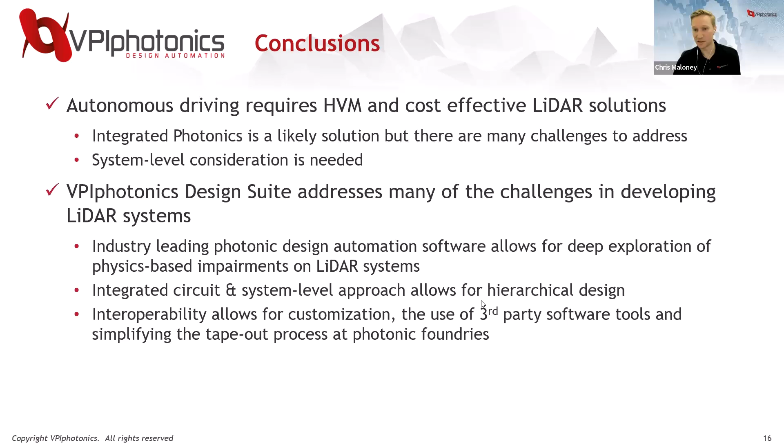And so VPI Photonics Design Suite really addresses a lot of those challenges in developing these systems. So we have this industry-leading photonic design automation software, so you can really study these physics-based impairments on your system. And we've also integrated the circuit and system-level approaches together, allowing for this hierarchical design. And then lastly, interoperability for customization. It allows for customization and use of third-party software tools, and it really allows you to simplify the tape-out process at photonics foundries.